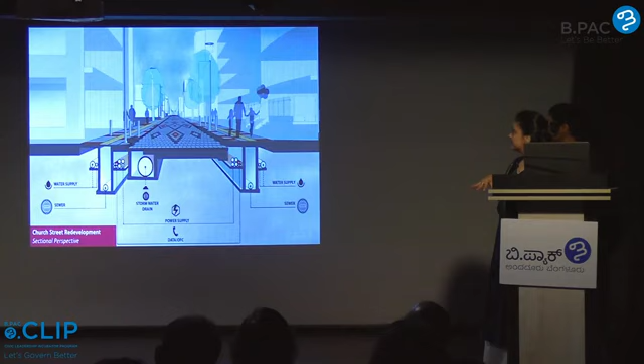And the idea really was very simple. This is a cross section, but very simply, it basically organized all of the services that were below grade very neatly and simply, ensuring that tomorrow, if there is a problem, the road is not dug up.

But our learning, which was very important to us, was that if you put public into public infrastructure, and by public we mean human public, a lot of the times there's a mechanism of self-monitoring that kind of happens organically. Not all infrastructure needs to be gray and utilitarian. It can still look pretty and nice and be functional at the same time.

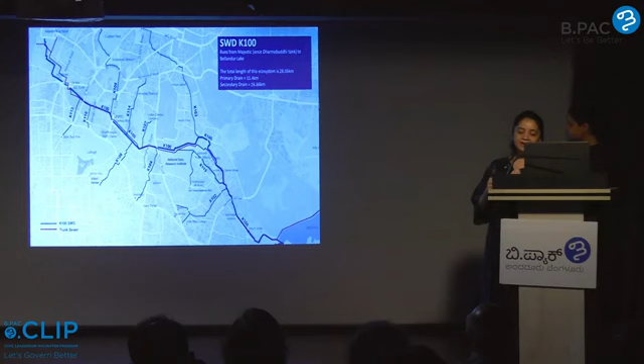Taking these learnings, we went from a fairly small project to a fairly large one. This is the K100 Citizens Waterway. K100 stands for the name of a drain, the nomenclature BBMP uses for all of their drains. K stands for Koramangala, so it's in the Koramangala Challaghatta Valley. It's the first primary drain, which is why it's called K100. If everyone's familiar with Bangalore, the blue line you see is actually the K100 drain.

It starts at Majestic, at what used to be Dharmambudhi tank, and then comes all the way down through the old city, Sudhamnagar, Kalasipalya, Shantinagar, Koramangala, and drains into Bellandur. The red line you see is actually the trunk sewer of the city, meaning all the sewage of Bangalore city flows through it. Now in some places it's under roads and older houses, and in a lot of places it's actually under the bed of the K100 drain.

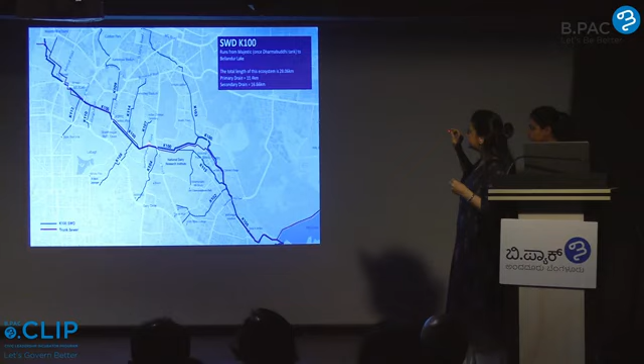What does that do? We'll answer that question. Every drain has a watershed, which basically means any water that falls within a particular area will find its way to K100. In the case of K100, it was about 32 square kilometers, a considerably large area in the center of the city.

The project really started in June 2020. It was presented to the then Chief Minister, Mr. Yediyurappa, and then to various different experts with the Pollution Control Board, the National Green Tribunal, and the work finally began somewhere in May 2021. It was supposed to be about a year and a half. The project is still continuing for various different reasons.

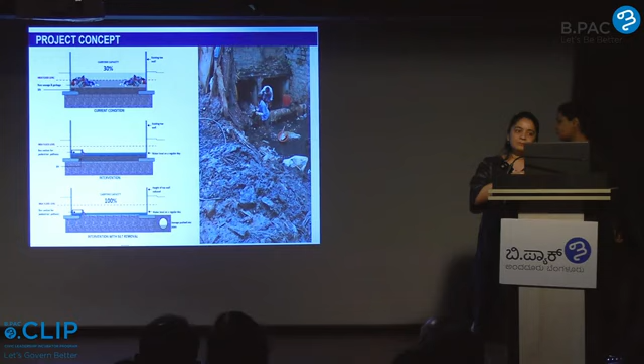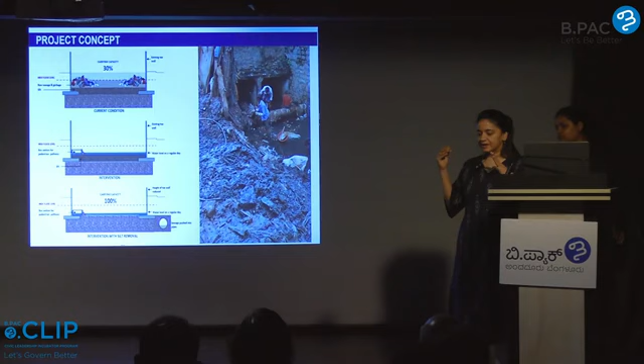When we started, the image on the right is within Kalasipalya, and all that black-gray material you see is actually silt. This hadn't been cleaned from the drains in we're not sure how long. So that basically clogged up the drain, and the carrying capacity of the drain, the amount of stormwater it's supposed to carry, was reduced from 100% to close to 30%.

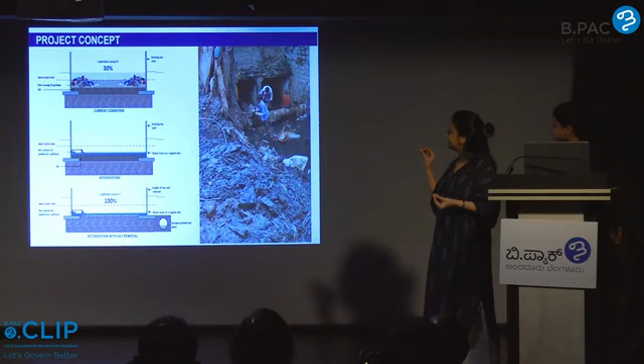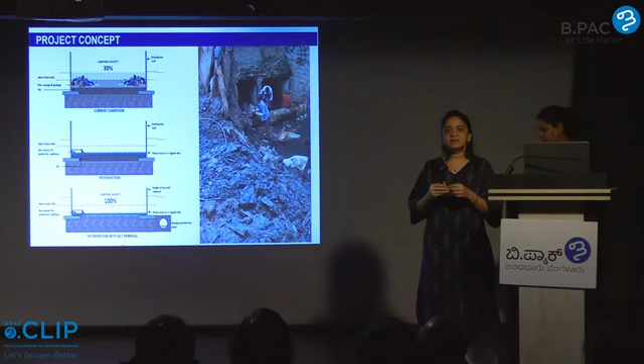The idea really became to de-silt. So that is what those men are doing - cleaning, desilting, and then introducing a pathway within the drain where possible, based on our own calculations and simulations done by the Karnataka State Natural Disaster Monitoring Centre.

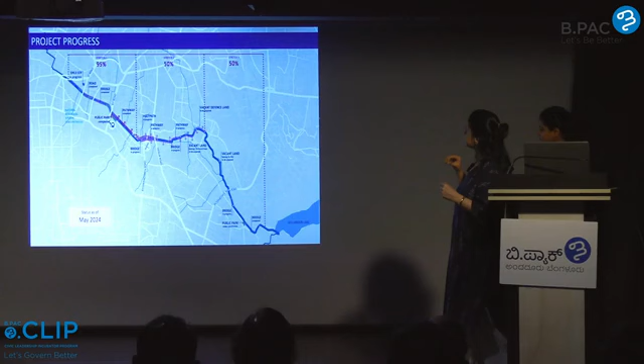As of now, the first phase is about 95% done, the second phase 10%, the third stage about 50%. During the course of this project, a lot of things happened. The desilting, like I said, hadn't been done - close to 12,000 truckloads of silt were removed from these drains. A lot of the sewage outflows being discharged within the drain were also removed.

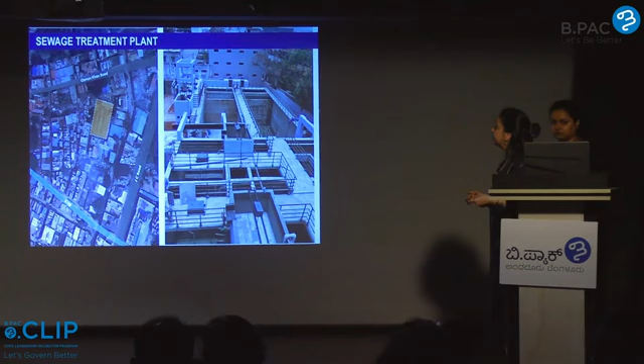As part of the same tender, there was also a 1 acre piece of land identified within Kalasipalya, where a 5 MLD STP is being built. It should be operational within another month. The idea was to decentralize a lot of the infrastructure that the city is making.

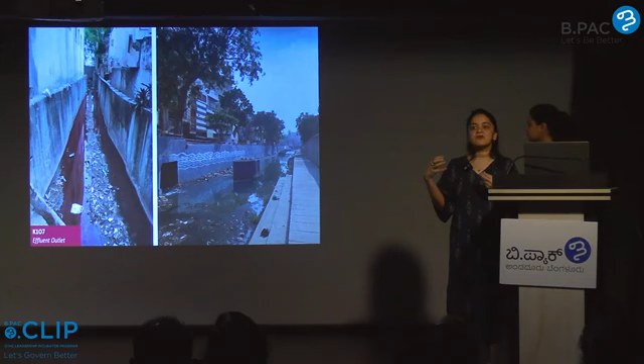This is something we continue to deal with even today. There are a lot of smaller dyeing units, cottage industries along the stretch of the drain, so sometimes the water is red, sometimes it's blue. It's not feasible to remove these cottage industries from the city - they're sort of interconnected. So this idea of using plants to clean the water naturally was introduced to address this small percentage of effluents released into the drain.

What we thought was a fairly simple structure - this is a project owned by BBMP - suddenly a whole host of stakeholders emerged that we continue to deal with, to make sure there's coordination among the various different stakeholders. To show you the progress of the last 2.5, 3 years...

This is in front of Shanti Nagar bus stop, and we were actually lucky to get a vacant piece of land. What you see boarded up was actually a vacant piece of land - this was a condition that belonged to BMTC. This was the condition in most places where there were services cutting through across the drain - all of these were rerouted. This is what the space looks like today. There's a public plaza, and a lot of the people waiting for their buses actually come and wait at the upper level plaza opposite the bus stop.

A lot of the bridges, close to 25 bridges, were redone. This was the state of the bridge further down from the Shantinagar bus stop, and this is what it looks like today - new bridges, with no structural supports that fall within the drain channel, to make sure there is no blockage.

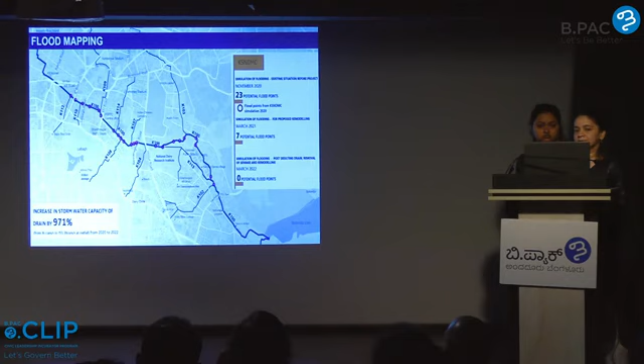Before this project started, we did a flood mapping with the help of the Karnataka State Natural Disaster Monitoring Centre, and they had identified about 23 potential flood points. Most of them were at bridges. A lot of the reasons for that was because the structural supports actually fell within the drain.

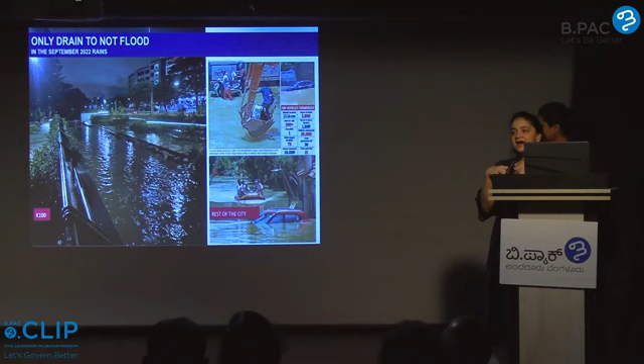These reduced to 7 by March 2021. At the moment, we have none. In fact, in the last bad flooding in September 22, this drain did not flood at all. That was the highest water level that we saw within the plaza in front of Shantinagar bus station.

Using this pilot, BBMP has actually been able to secure close to 3,000 crore in order to upscale this particular solution across the city. So that's phase 2. We're probably not the only ones going to be involved. There are a lot of other people who are interested. The government has taken a lot of good steps towards ensuring that the city is resilient for the future.

And really that's where we started from, right? This is what we call a render. It's not real, but it helps us understand what the design of the plaza would be. Over the last 2.5, 3 years, this is where we've come, which is fairly close to where we started, a design on the computer.

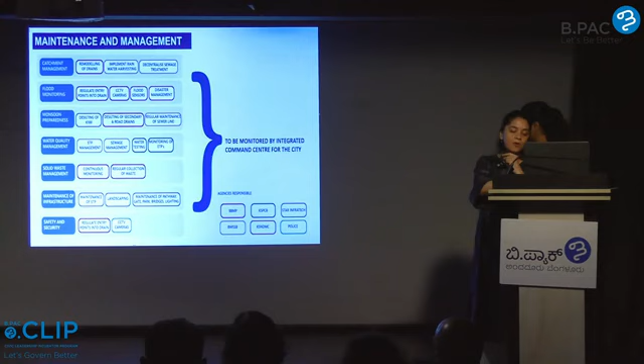In terms of handing over, the maintenance and management continues. There are a fair amount of guidelines on how to manage certain situations. All of the CCTV security feeds are directly connected to the integrated command center at the BBMP head office, so there's constant monitoring to ensure that this project continues to become what it was supposed to.

So, hi, I'm going to explain from now, briefly, the last two projects that Nidhi has taken you over. The idea is that to create that public space impact we want to see on the ground, there are a lot of things that need to happen behind the scenes, underground, in terms of infrastructure development and management, for even a small proportion of the city to function the way it has to. So we can't only think of public space creation as beautification, like what Nidhi started out saying.

In that context, this is a project again in VV Puram Thindi Beedhi. The idea is to upgrade the street services and create a better environment for the visitors to the street.

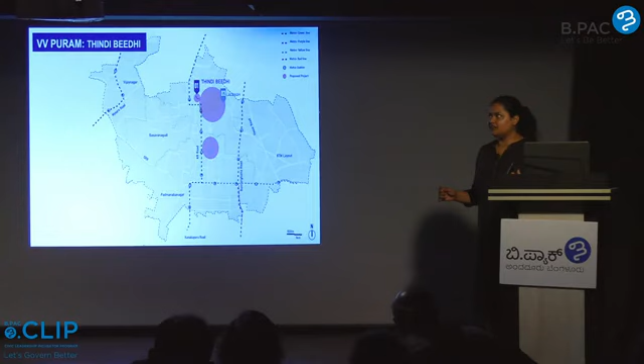So this is Bangalore South Zone, and VV Puram Thindi Beedhi comes around here. At a city scale, it attracts a lot of people who come here to have the specific snacks that are being made over here, especially during Avrekai Pariche and the Sajjan Rao Circle festivals, when there is a lot of crowd that specifically comes to this space. Hence there is a potential for it to be known as a city-wide public space as well.

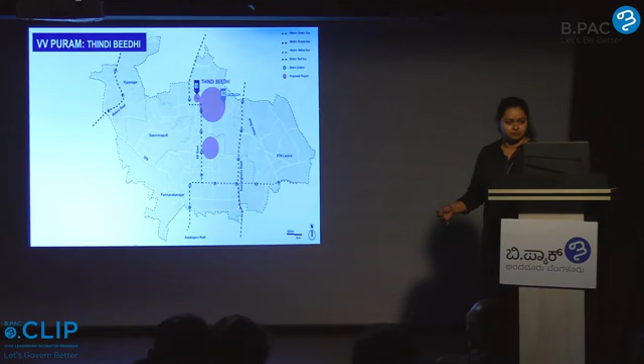Livability, in that you need to actually interact with other agencies, and with such a strong concentration of these food vendors and shops, there is a possibility to share resources between them and to create pedestrian friendly and visitor friendly spaces there, and to create a distinct identity for this street.

The idea is that during the day it is open for vehicular traffic, but during the evening from 6 to midnight when the shops are open, it works only as a pedestrian street. There are benches and tables that are inbuilt, including planters on the stride, which naturally allow people to sit there, take some dosa from the darshini, keep it there and eat it, and the solid waste management is again taken care of collectively.

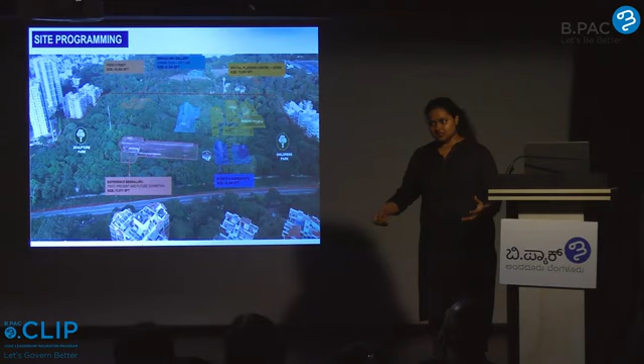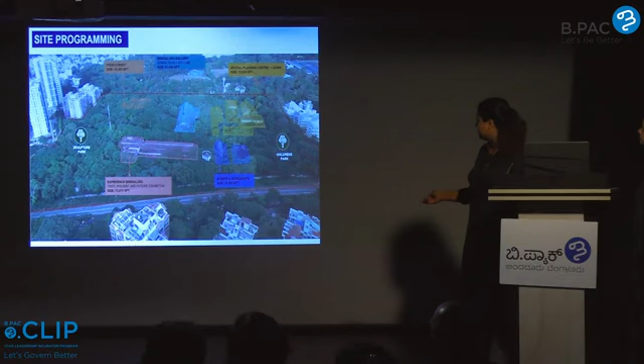This could potentially be a space that brings everything together, where you bring in the public to learn about this—evolving our idea of bringing the public into public infrastructure, creating more citizen awareness on the issues that affect their livability and ease of living in the city, and enabling better conversation across the board. This would create a space where the government, experts and citizens can come together and brainstorm, or the government can inform citizens what is going to happen. The rest of these spaces were developed mainly as public space with some food streets, workshop spaces and parks.

This was the master plan that was created for it.

So what exactly is that space? It's a space to visualize the city—maybe you can come and see a model of the city. This works for citizens, for people actually working in the city, for government staff, engineers, and bureaucrats, and it also works for a tourist coming to the city who wants to understand what is actually happening there.

It's a space to experience the history and developments of the city, a space to learn about what the city is doing—how is the city's energy consumption, for example, and how can each individual citizen in their own home do something that helps the larger agenda of energy conservation in the city.

It's a space to imagine the future, where children, students, young people, as well as experts and established professionals, can come together and think about what the future of this can be like. What do children imagine their future being, and how do we actually try to incorporate that into the city's vision?

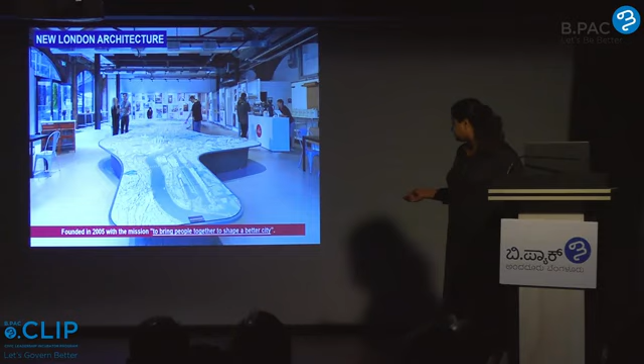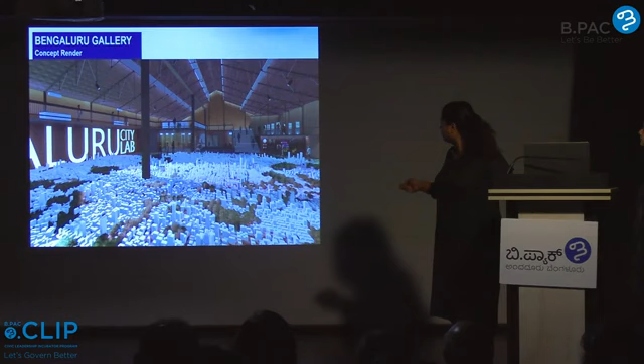This was a render made for the shed in one of the large existing sheds in the Mysore Lamps factory, where we could have a large model of Bangalore on the floor, and you can learn about the city and experience the past of the city.

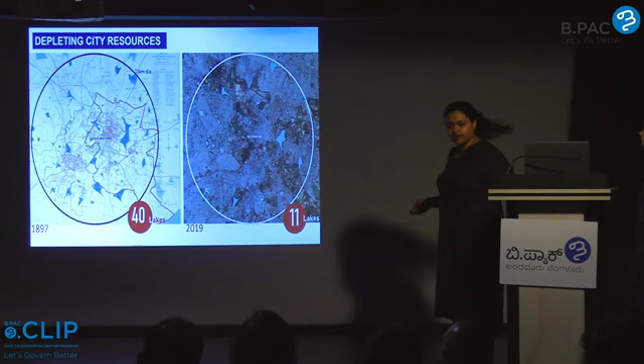You can see how resources have changed from the past to now, and debate on what we can do to get over the problem of multiple agencies working in silos across the city. So you have a spatial planning center where one portion is meant for public interaction, and another portion for the government's use to design and plan the city, to create traffic simulations. If we create this much development here, what happens to the traffic coming near there? So you try to look at everything more holistically.

This is another proposal that has been made many times over the years, of an education and heritage district within the city.

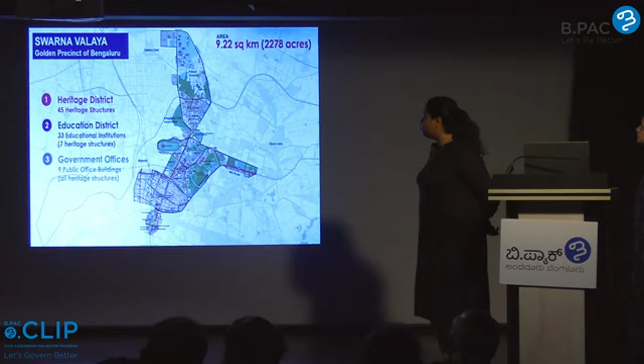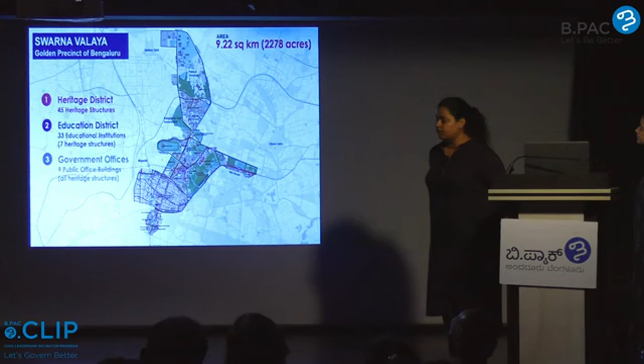In Bangalore, we are right here, inside the heart of this area that we are proposing. From Tipu Sultan's palace, which is in the old fort area, to Bangalore Palace, there is one long road, about a 4.5 kilometer walk, which has heritage structures and institutional structures of 4 centuries that you can learn from and experience across Bangalore's history.

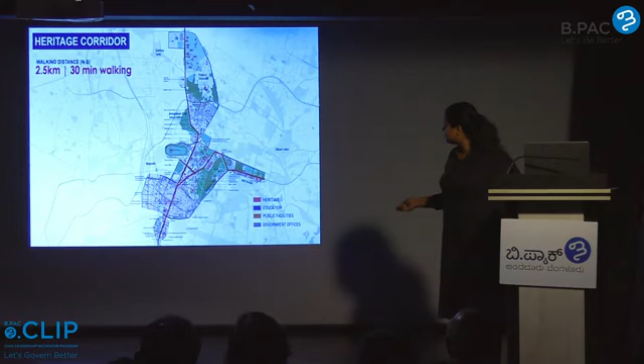One aspect of the project is to create a heritage corridor where people can go and view the heritage of the space to understand the history of the city. But another important aspect is that these multiple institutions of multiple eras and multiple agencies being situated so close to each other is actually a very big asset in the city.

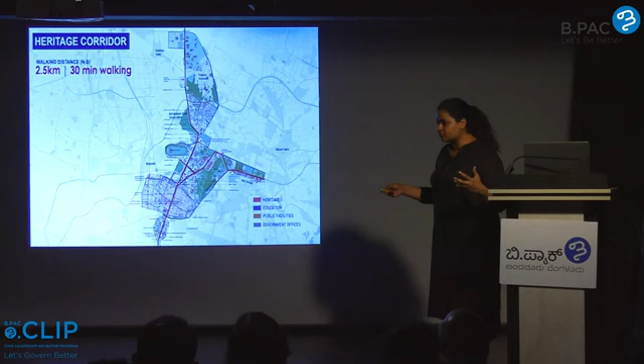This is something that cities like London and New York have been able to utilize - the ability of having your student population and your entrepreneurial population right next to the government. So in order to bring them together and to actually do something, there is a very good opportunity in this sense to do it over here.

This shows some of the heritage buildings across the 2.5 kilometers, and this is the central district primarily - you have educational areas which are 90% government universities, and you have government offices.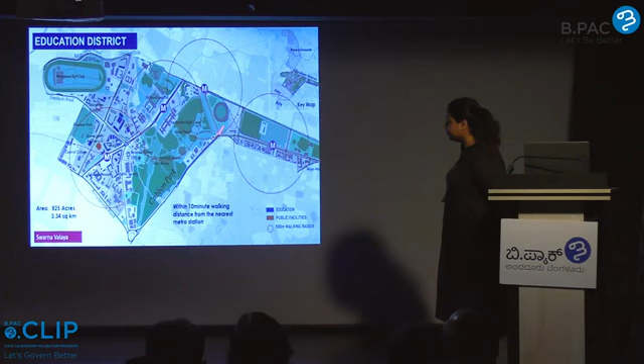The idea is that you can bring them together through multiple ways. You have so many different types of streams, many multidisciplinary facilities within this area, and with the new education policy and integration into a larger spatial realm of the city...

we can try to look for common resources where students across education universities can share resources, where different companies try to set up campuses within education universities in order to help with research or to aid. So many things like that can be thought of in this particular space.

Physically, the idea was to install a lot of signages across, so you can understand where you are in the city, why it's important, and have markers for events and important people who lived in these spaces, important activities that took place there - an important way to get to know your city.

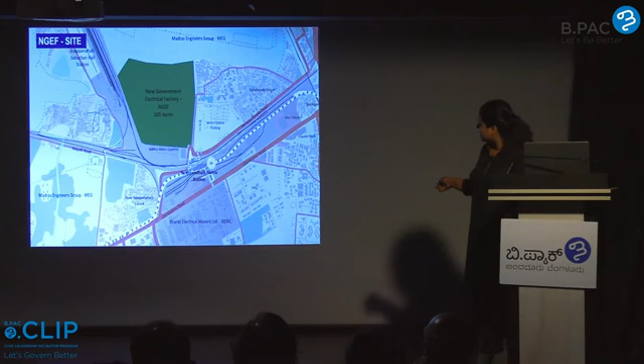So the NGEF land is located right behind the Baiyappanahalli station. It's got a very large amount of trees, park and plantations, and very large sheds. It's about 105 acres of land abutting two railway lines and the MEG group. This is how it looks.

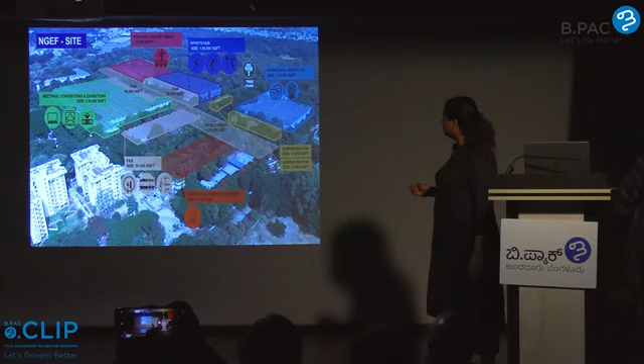The larger idea for this space, because we have very large sheds, was to incorporate meetings, conventions, and exhibition spaces that aren't available close to the city, to have sports hubs with actual world-class athletic training facilities for the public, and open-air concert venues, since it's not abutted by very close residential areas. So this would be a key win there.

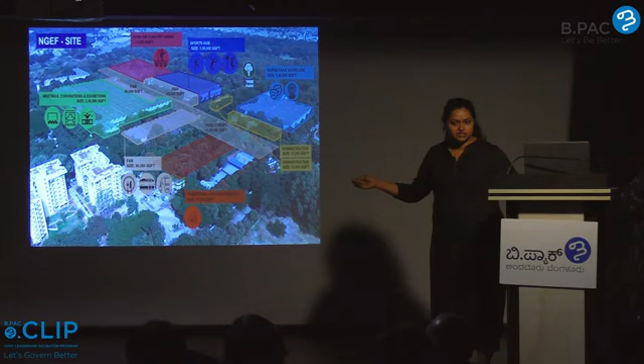One thing we were promoting is a large F&B component, especially because we are close to the Indiranagar area. We've always had a problem in Bangalore where commercial and nightclub activities come too close to residential areas. If we want both to happen in the city center, in terms of the economy and the different demographics in the city, then moving it just a little bit away, not too far, would be a good idea, since this isn't close to residential areas, so we can control noise and sound levels without disturbing surrounding areas.

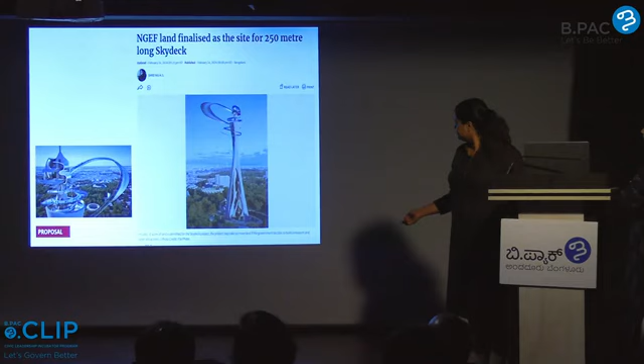The first idea was that the top part of the land, about 60 acres of green area, was to be opened as a park for residents, especially since east Bangalore doesn't have very big parks. Most recently, the government has proposed using the land for a sky deck, though I think this proposal has now moved to another piece of land.

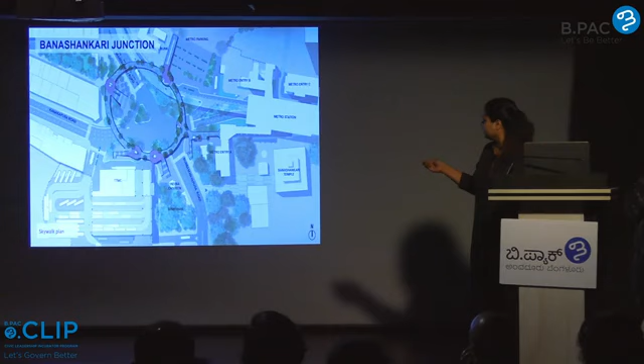We have 4 elevators, 1 escalator, staircases and plazas everywhere, and ramps as well. So if you look at the day view that was proposed, you have not tiny staircases, but big staircases that can actually act as public plazas.

A large part of the road design was also to streamline the road geometry to make it conducive for vehicle movement, not just for idle bus parking. Areas were located around that were designated for extension of the bus stop, where the bus could be parking, where there will be auto stops, cab stops, which are necessary near so much transport infrastructure.

And these types of large plazas, there are 3 of them on 3 sides here, which were designated for the specific 368 registered market street vendors that were being put there under different categories. So there was food, there was the temple hawkers, which was mainly flowers and coconuts, and then there is also a large bamboo market there and pottery.

And so at the ground level, they could serve the larger pedestrian network of the city and the larger public space of the city. This is another way to look at the Cauvery Junction, which is the entrance from coming down from Mekhri Circle to Palace Roads.

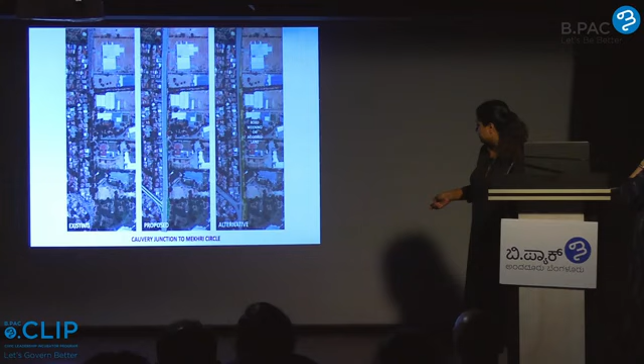So the existing situation is here that you can see. What happens is, when we go straight up Sankey Road, we will have to turn around and go back this way. And the same thing when you come back, you can go straight. The issue is that the underpass that has been put there has not really served the purpose that it was made for.

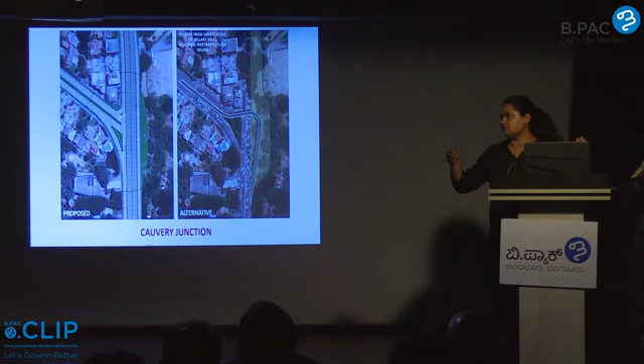So the idea was to create a suspension bridge that took you from here directly to here, so your main Bellary Road is free of any navigation that you're doing, because in road hierarchy and the larger city scale, it is important to designate through roads, and roads where you need traffic to move slower, and roads where they are directly accessing utilities like shops, restaurants, and even houses.

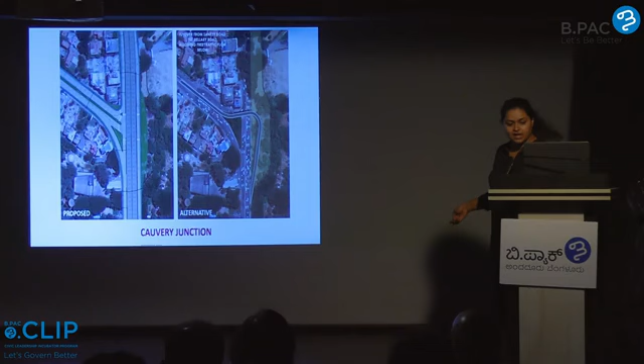So in this case, this is one of the major arteries of the city, and hence it needs through movement, and people coming from Sankey Tank or Malleshwaram side will take the road to go up. It will also serve an additional purpose that, having a suspension bridge this way and entering the city like that, it acts as a little archway for entering the city.

This is a view from the top. This again was proposed some time ago when the BBMP had actually almost acquired this amount of land, though I think now that is not going to happen.

So this is what the firm does, mainly as architects and urban designers. We take up a lot of projects, and this is something that we are doing in government educational campuses across the city.

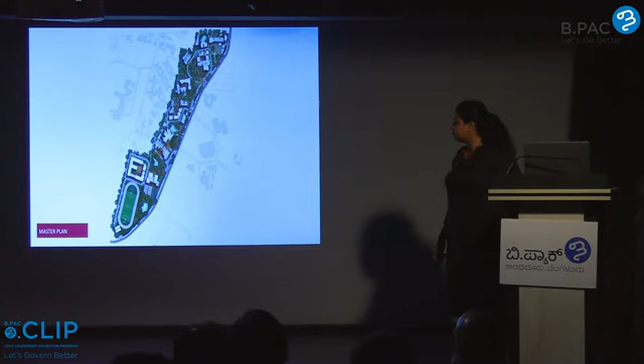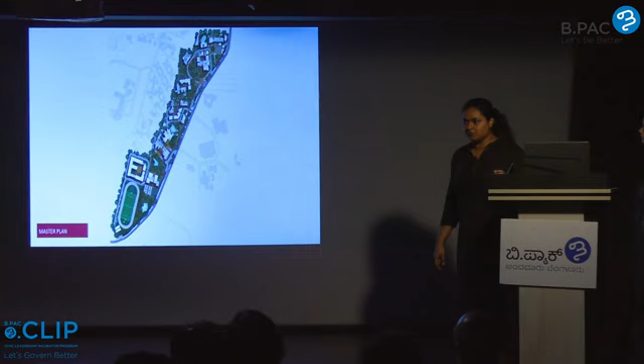You must be aware of the National Law School in Bangalore. This is their campus. We've recently completed a master plan document for their campus, looking at their future growth requirements 30 to 40 years ahead—how many more academic areas, staff requirements, hostels are needed—and with all of that, how do you still preserve the integrity of the campus, preserve the green spaces, and look at sustainable approaches to growth.

This is an aerial view of what was planned. Since the completion of this master plan, two of these buildings have been separately awarded in competitions, and they've started construction.

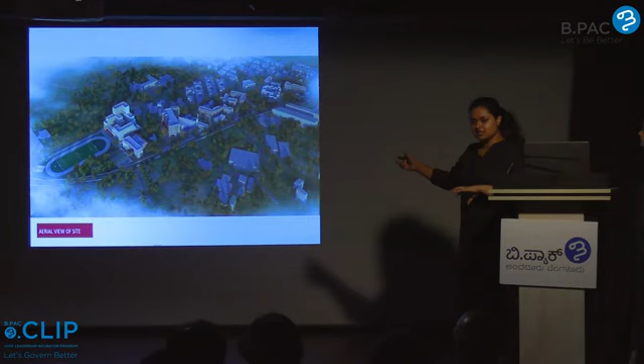The idea of the master plan, like it should be for the city, is to actually arrive at what is the requirement, what should grow. So then I know exactly—in this building I want 10 more classrooms, I need to house so many more students across the streams we're offering, and hence we will need to build this. So it's the ability to build that in.

This is a project we are—this is still in process—the NIMHANS campus in Bangalore. This campus is very big, it's 135 acres. This is Dairy Circle, so Bannerghatta Road, and Hosur Road is coming from Lal Bagh. This is the main part of the campus that most of us go through if we cut across the city, where the hospitals are. They have residential areas, administrative functions, library functions, museums, and all of that as well.

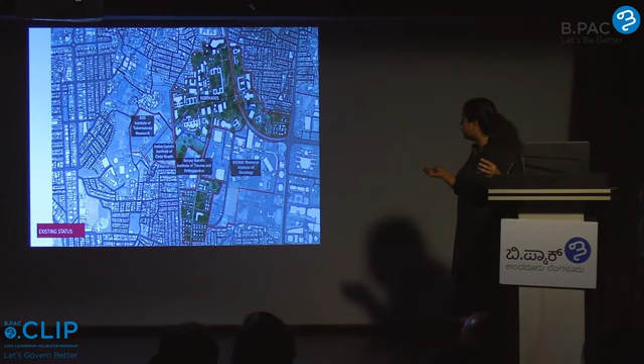The large part of this is to say this is an interesting case, because being a government hospital, it's a very important function to have. They're talking about mental health and public space, and mental health in the city has a lot to do with our living environment. So it was very important for us that the living environment of the campus—for the patients, their families, and the doctors and students who are there—is actually conducive to what they are learning, teaching, and practicing across the city, the country, and the world.

Our major proposal has been to—because right now we go through the campus this way and cut across the hospital, which is becoming a very big problem for patients, as it's a high traffic area right in the middle of a campus. When someone is already stressed and has been told they need to go into an emergency department on that side, it's a very stressful situation.

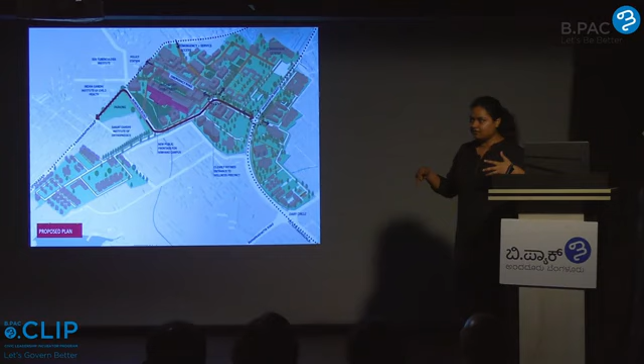So we are trying to reroute the public road, maintain public access through the space, but also create an integrated hospital area that is very conducive for the patients and students, and within that create spaces for waiting, external activity, and therapy that can integrate with the natural environment of the campus. One big advantage we have in Bangalore is our trees and natural heritage—the green areas of this campus are over 120 years old, and it's very nice for patients to be interacting with them, because right now they are unable to.

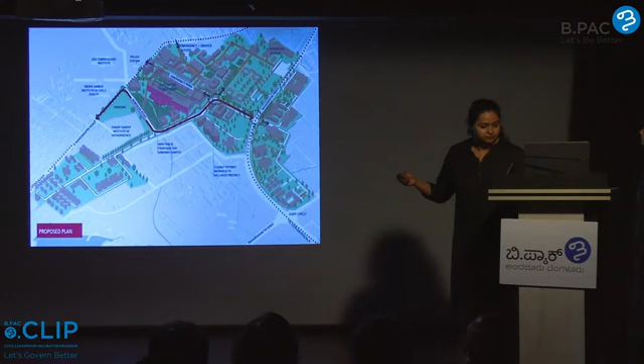So I'm going to end here. This is, I would say, the smaller version of one of the multiple proposals we've shown you till now.

This is on Church Street, and it will be called the Bangalore Design Center. It will house discussions on the city. It will house large archives, a large library on the city of Bangalore. We will have maps, databases, photographs, crowdsourced photographs from multiple old families from the city, old employees of PSUs, etc., that are collated in this one place.

So it acts as a database for anybody wanting to learn about the city, to work in the city, and to propose something. We will be bringing in collaboration with multiple institutions and other stakeholders, and try to bring in experts on different subjects so we can have a collaborative discussion and informed opinion on multiple issues to do with living in the city.